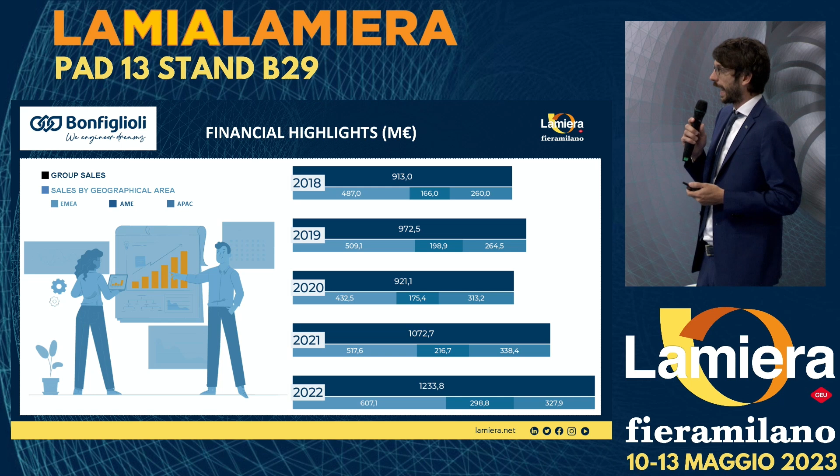In terms of numbers, we have to say that recently our growth has been massive, because in 2021, as you see, we overcame the threshold of €1 billion turnover. And also during the COVID year in 2020, we managed to keep the turnover at a very reasonable level compared to 2019. And in 2022, we passed 1.2 billion.

In terms of footprint, we are proud also to present our new factory in Bologna, our new headquarters, which is called Evo, from Evolution, where we are capable to produce, and we do produce, more than 1 million gearboxes per year. We have 15,000 square meters for machining, 20,000 square meters for assembly, and 400 employees over there.

Let's go more in detail about the metalworking application. So what do we do for our customers in the metalworking industry? Here we have an example of a laser tube cutting machine where we provide several drive systems for different axes. So we have industrial gearboxes coupled with asynchronous motors and open loop inverters, for example, for the bar loader axis, for the push feed axis, and also for the bar unloader.

On the other side, we also have more sophisticated, more precise mechatronic solutions, for example, for the bar size changer and for the load and unload pinches, with planetary precision gearboxes, servo motors, and servo inverters.

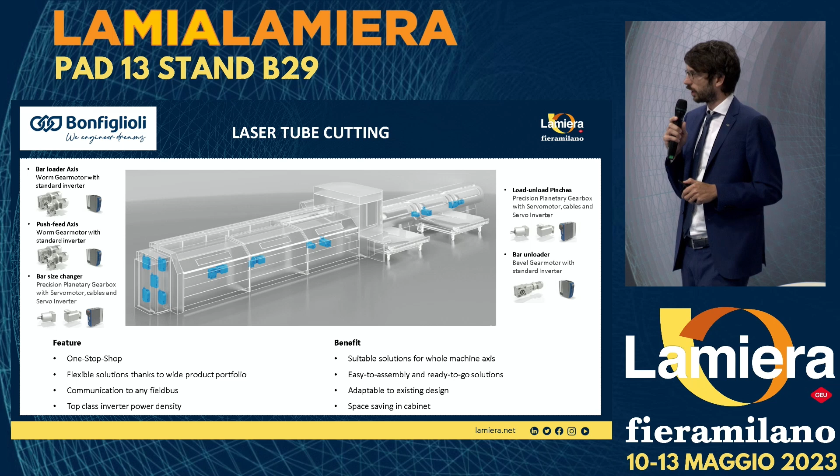We are also capable with our inverters to communicate with any fieldbus, and so we are adaptable to existing designs. And also, again on the inverter side, we have top-class inverter power density, meaning that in the cabinet we take less space than our competitors.

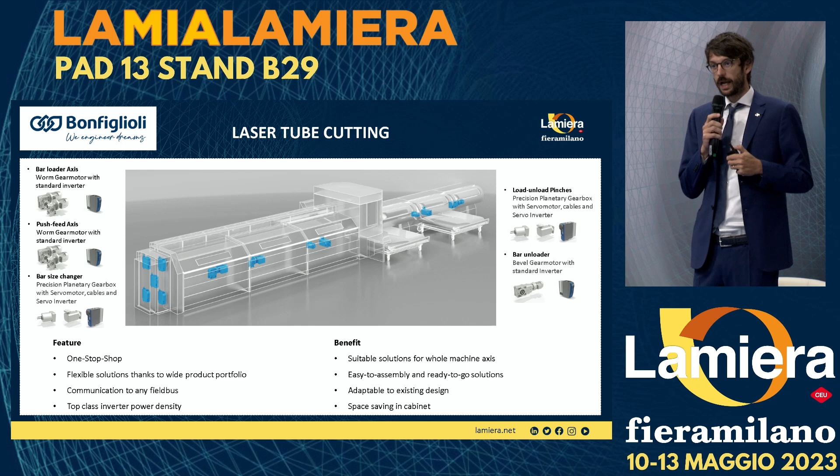Another example is a fully automatic working line for metal sheets. You can see here the different solutions we provide. So we have gearboxes for the tray pulley, servo gear motors for translation, high translation, lifter, Cartesian manipulators, centering devices, and conveyors.

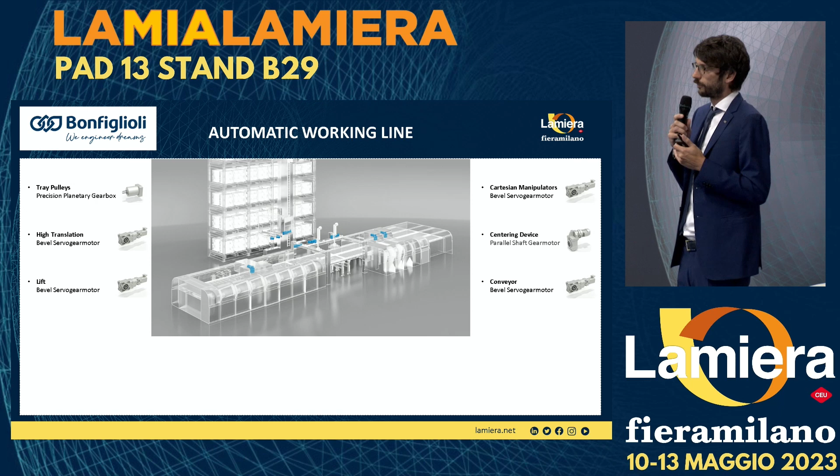So what we propose to our customer is also, again thanks to the product portfolio, the capability to combine industrial gearboxes, with good enough precision, with servo motors, meaning that we also provide high dynamics. In this way, having products which are fully controlled by the Bonfiglioli R&D, we are capable to give you what you really need, and this was really a big success case.

In terms of features, one-stop shop, as I spoke before, the concept is the same. We also have sector expertise at your disposal for co-design. We don't come to you and say what we hope you will buy, but we are flexible enough in order to find a solution together.

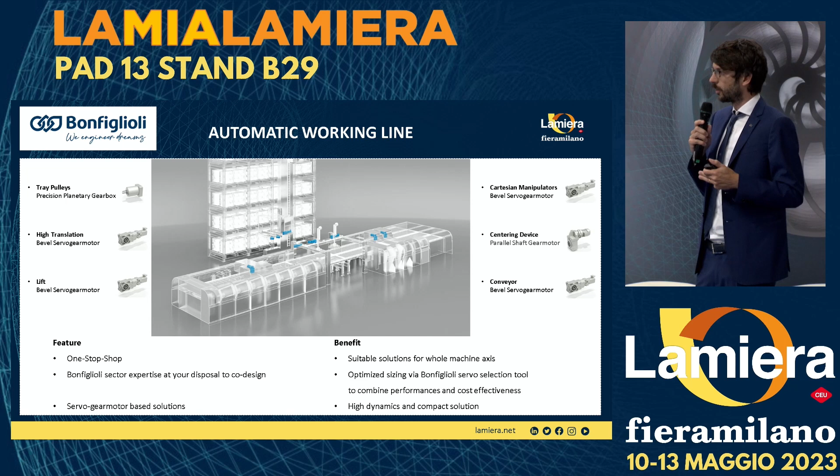So we can optimize the sizing via the Bonfiglioli servo selection tool to combine performance and cost effectiveness. Our aim is to provide you just what you need, so just the performance that you need and not more, not asking you to pay more because we have to over-dimension. As a last feature, we also have servo gear motor-based solutions. So, as I was saying before, high dynamics with good enough precision and a compact solution overall.

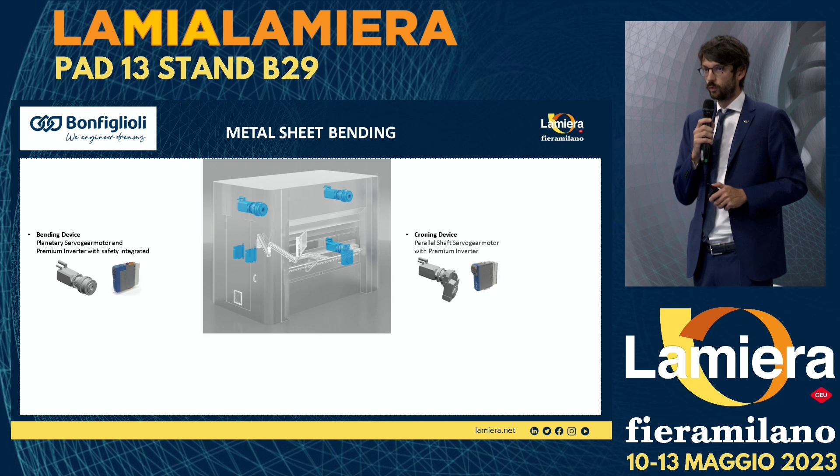Another solution we are proud to present is metal sheet bending, the typical servo press. What we provide is servo gear motors plus inverter for the bending device, the one you see on top. Here we typically offer a planetary industrial gearbox coupled with the servo motor and premium inverter. In case the customer asks us, we are capable of offering it with integrated safety. Also for the Croning device, we have a parallel shaft servo gear motor with premium inverter.

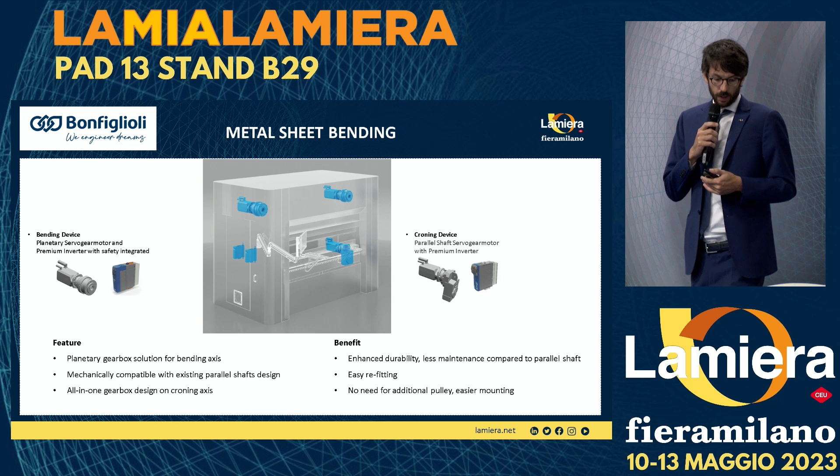What does it mean in terms of features? On the bending device, the planetary gearbox solution for the bending axis has the benefit of enhanced durability, requiring less maintenance compared to the parallel shaft design. We are mechanically compatible with the existing parallel shaft design, so this means that we take the same space, really up to the centimeter, and this makes our solution easy to retrofit on existing machines or existing designs. And on the Croning device, we have an all-in-one gearbox design, which means that there is no need for additional pulleys, and it is much easier and much quicker to assemble.

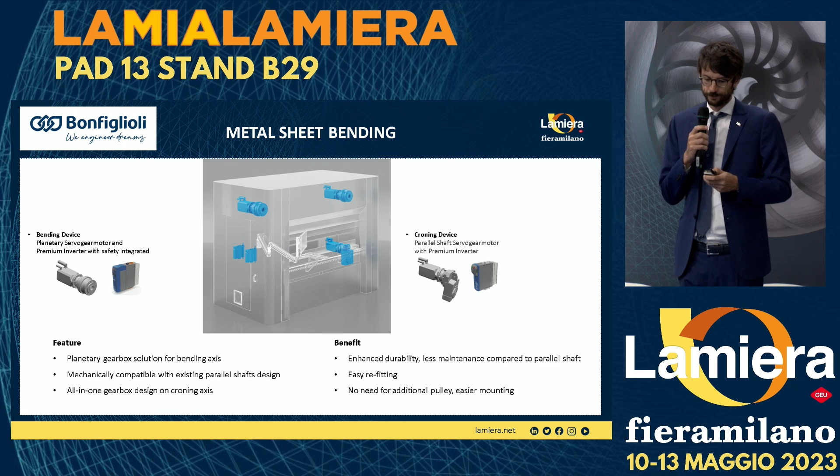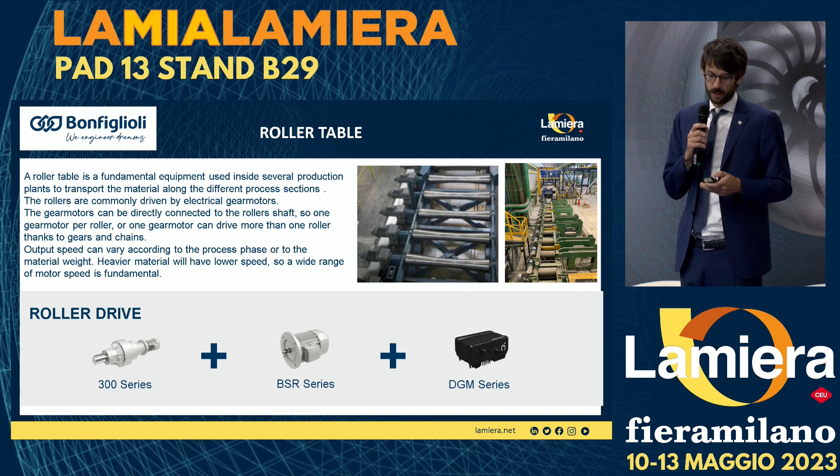What are the benefits here of the 300 gearbox? The benefits are typically robustness and high overload capacity. Being planetary, it is capable of managing stress in a much better way than a parallel shaft or bevel design. With the BSR, we are capable of reaching IE4 efficiency due to the fact that we don't have copper in the rotor. So there is also the torque option. And overall, we can call it quite a cold motor, so the performance is quite flexible and we can push it a lot.

On the DGM series, the decentralized inverter, we have an integrated PLC. This means reducing the wiring cost for our customer and reducing electrical cabinet size. The power range in this case goes from 0.37 kilowatt up to 30.

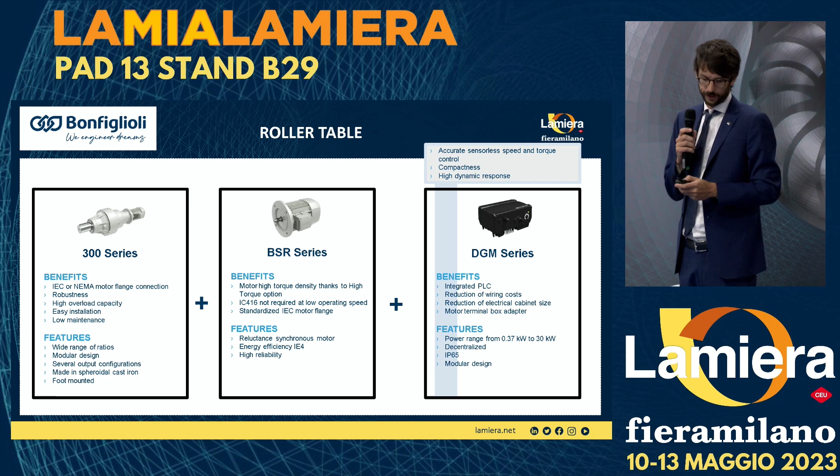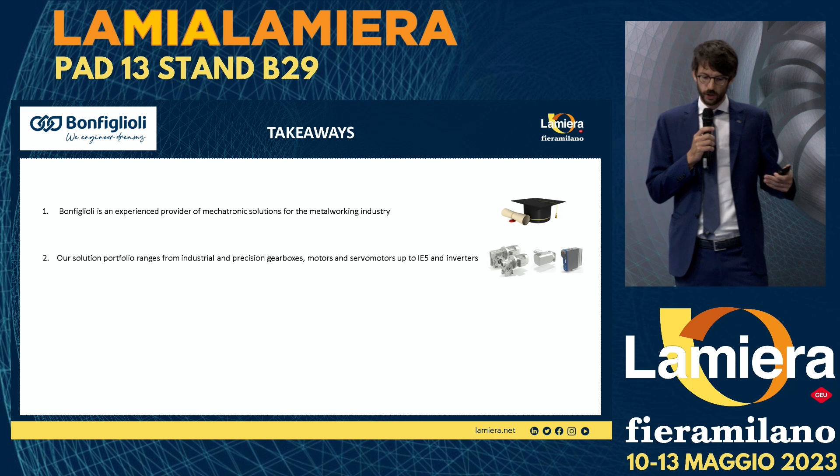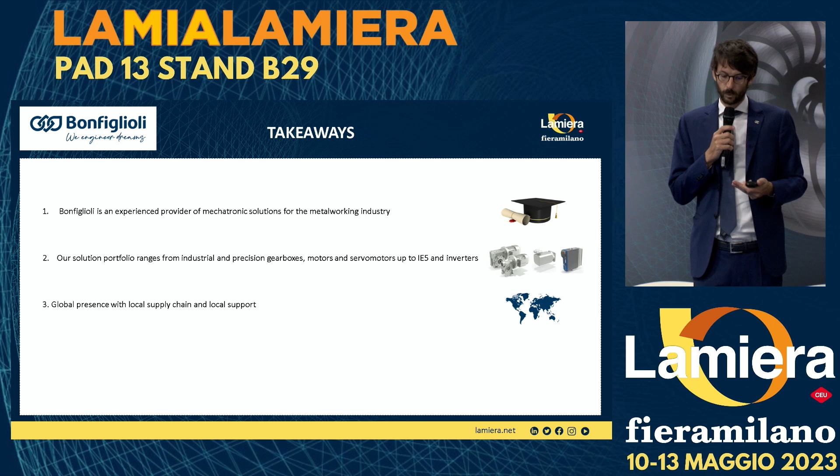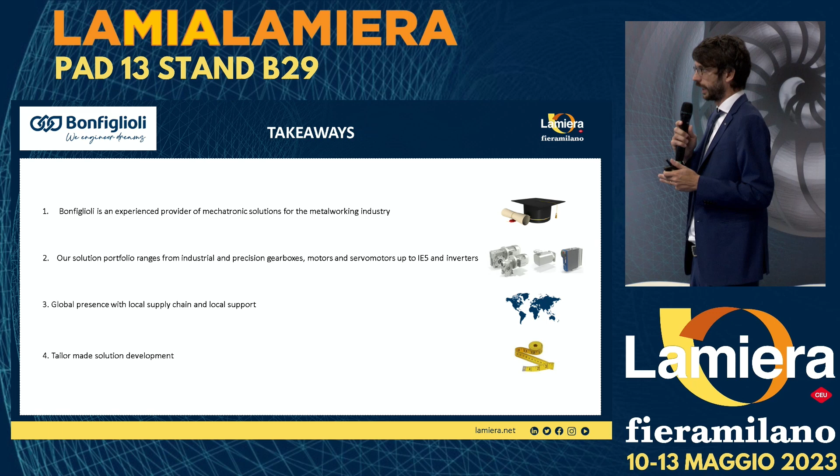Some takeaways just to finish my speech. Bonfiglioli is an experienced provider of mechatronic solutions for the metalworking industry. We have worked in this industry for decades. Our solution portfolio ranges from industrial gearboxes to precision ones, motors and servo motors, up even to IE5, and inverters of different types. We have a global presence across the continents with local supply chain and local support. And we are really fully oriented to tailor-made solution development, to co-design with our customers.